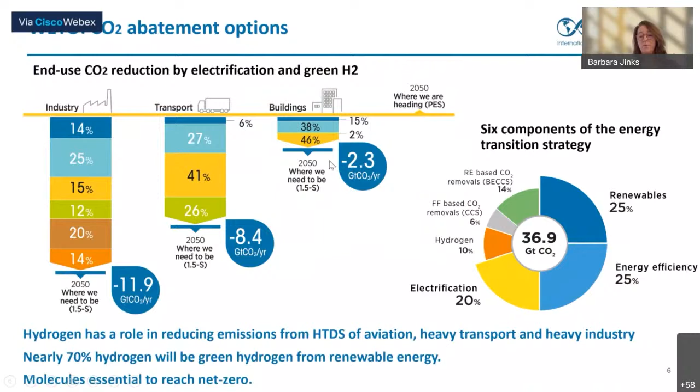So this is why hydrogen is important, and this is why in 2020 we started working on it. One of the key things is not doubling up, not wasting people's time. Our representatives must be invited to a meeting in IRENA every week because we do so much. We look at all renewables. Sorry, I didn't say that we do this for geothermal, solar, wind, tide, wave, current, and bioenergy, the 6 different renewable sources.

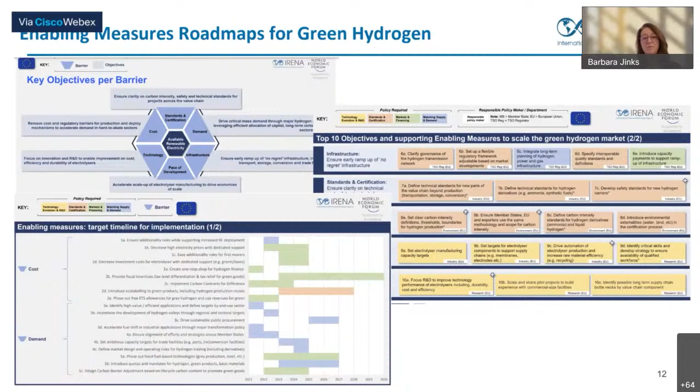Expectations are half the trade will be by ship, but as ammonia, not liquefied gas. It's easier to transport, and it has a range of uses. And the other half, pipeline, of course, the cross-border land-based. Some of the sea, maybe from Algeria and Tunisia to Italy and the other countries. And trade will be mostly regional, not as global, but like LNG. LNG started regional, then it went global.

So I realize I've got a few minutes left, Piero. I'll go a bit faster. Could you please wrap up, so we have time for the Q&A.

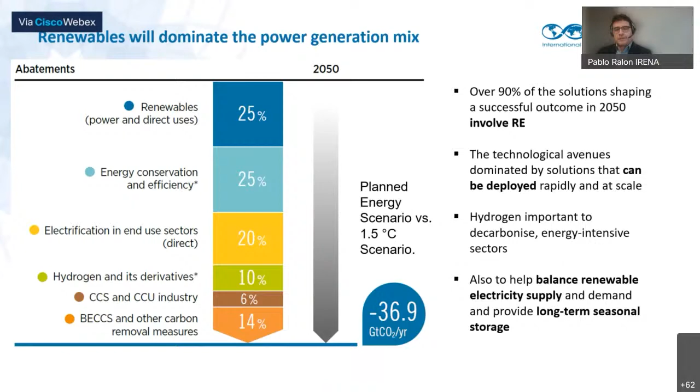Hydrogen also, Barbara talked about hard to decarbonize sectors a little bit more in detail, but importantly, hydrogen can play a big role in balancing renewable energy supply, and also long-term seasonal storage is an important thing that hydrogen can contribute to. So I won't go too much into detail, just to highlight what has been said. The enabling policy framework at this stage is key. National green hydrogen strategies, we've talked a lot about that.

Now, Barbara mentioned that 12% of the total final energy consumption in 2050 will come from hydrogen, and about 2/3 of that will be green hydrogen. This means, in theory, we would need 5,000 gigawatts of electrolyzer capacity by 2050, which is a huge jump from what we have today. And therefore, scaling becomes quite an important aspect, right?

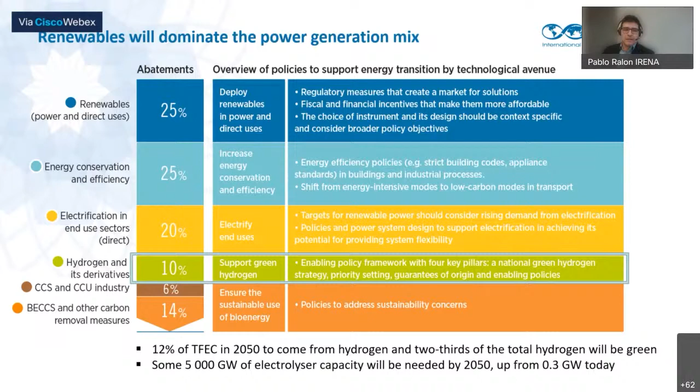The future will look very renewable. That's what we think. To get there, we need to think of power generation tripling compared to today's level by 2050. And 90% of the electricity in the world will be supplied from renewables. Solar and wind will have a key role to play here. Oh, my laser stuck. Try to undo that. And solar and wind are going to have a key role to play. For example, the installed capacity of solar PV would reach 14,000 gigawatts by 2050.

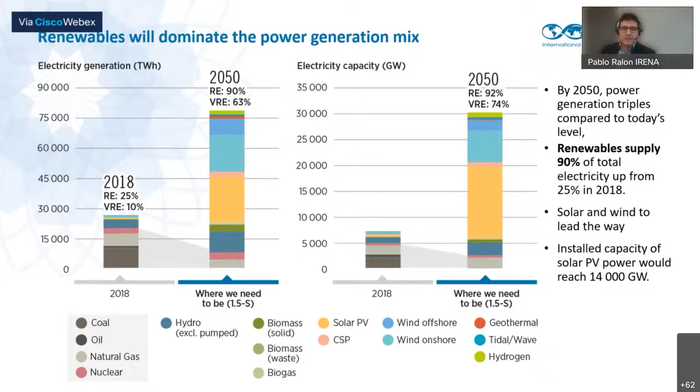But let's get to what people have been asking about. How do we get to competitive green hydrogen? Basically 3 elements. Of course, it gets more complicated than that, but we need 3 elements. We need competitive electricity, we need competitive electrolyzers, and that will lead to competitive green hydrogen.

If we take a look at the news, I don't know if you wake up today to the news. Some people have shifted to digital now, but back in the day, there was pretty much a lot of paper, and this was a lot in the headlines: renewables are too expensive, renewables are not cost competitive. So it's very similar to what we sometimes are hearing now for green hydrogen, in fact. But let's look at what has been happening in the last decade for renewable electricity costs.

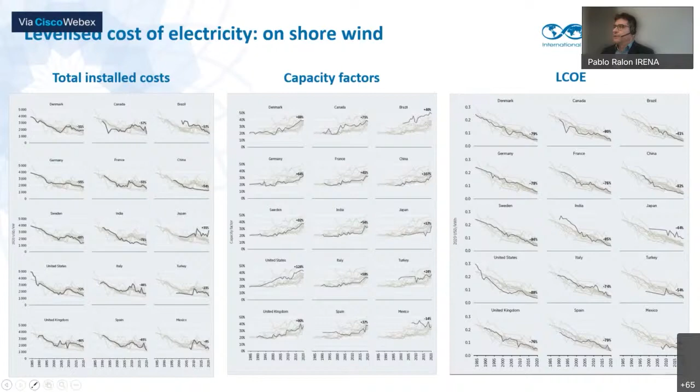Will this be enough to produce hydrogen? We'll see. If we take a look at an example of Saudi Arabia, we've seen some headlines of how you can actually get to very low electricity costs, and we can see how it would be possible to get to 1 cent electricity generation, which is already extremely competitive, of course, but this is the best case scenario with very good solar resource in Saudi.

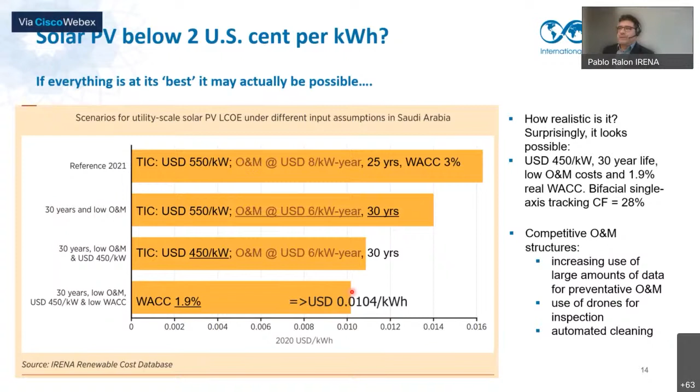This just shows how it might be possible to get to below 2 cents per kilowatt-hour electricity in some locations. Of course, it may not be possible everywhere so soon, but this is already very near term for some locations. We need not only cheap electricity, but also competitive, cheap electrolyzers.

Barbara has mentioned a little bit about what is needed in terms of getting there. Of course, quite a few electrolyzer technologies are being mentioned and are active and being researched on.

Alkaline and proton exchange membrane are already quite mature technologies with technology readiness levels of 8 to 9. Their scale is already higher than for the other two technologies, anion exchange membrane and solid oxide. Of course, solid oxide still has the promise of higher efficiency, and anion exchange membrane has the promise of very low costs, due to mass manufacturing possibilities.

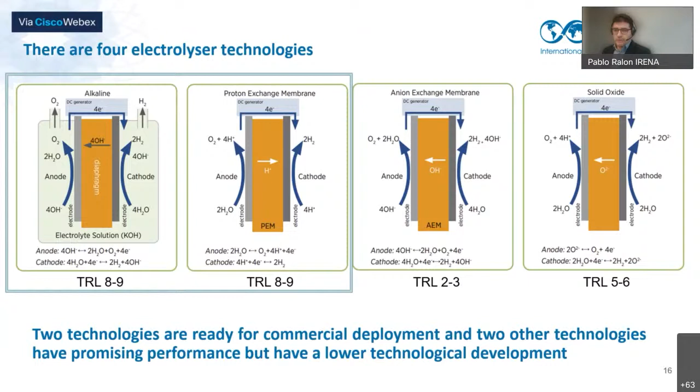But right now, alkaline and PEM are the more mature technologies that are already commercial. So we've tracked their costs - we've researched and surveyed the cost data and the performance data for them. The preliminary data shows a 60% reduction in alkaline electrolyzer costs from 2005 down to 2020, and 67% for PEM.

The efficiencies are harder to assess, but still we come up with a central value of 52 kilowatt hours per kilogram of hydrogen for alkaline electrolyzers, and PEM around 54 kilowatt hours.

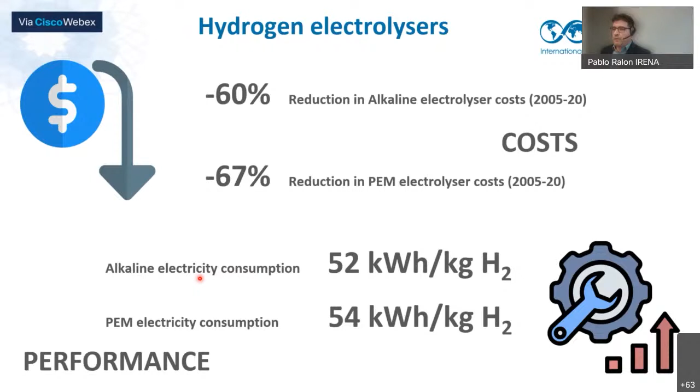So of course, cost as well as performance are important for this equation. Here you can see a little bit of that preliminary data. This is not yet published, but will be soon.

So we see for alkaline electrolyzers, a cost range has already fallen to between 350 to 1,660 per kilowatt. The low cost value is already very competitive, but we'll see how that develops - the central estimate is still to be defined, but it suggests a reduction of 61% from that time. Then for PEM, around 400 up to 2,500 per kilowatt in 2020.

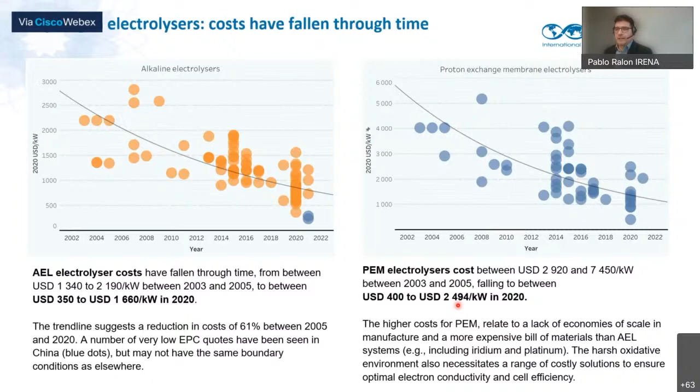Of course, there's not as much economies of scale yet for PEM compared to alkaline electrolyzers. The efficiency scaling, this important aspect, is not so easy to assess, like I said, but we have concluded around 52 kilowatt hours.

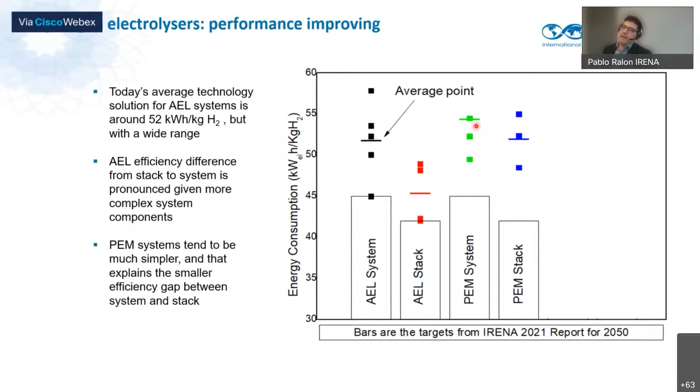This is showing a little bit of the range at the system level, and then here for alkaline electrolysis at the stack level, of course lower. The difference is a bit higher than for PEM because of the complexity of the system. But PEM systems are already very efficient as well, and we'll see how that develops.

What does it mean for competitive hydrogen? We have to check the numbers and see what happens in terms of the economics - this is an attempt at doing that. You can find more details in this report from IRENA, Green Hydrogen Cost Reduction, which talks in much more detail about how we get there, how we can get to competitive green hydrogen.

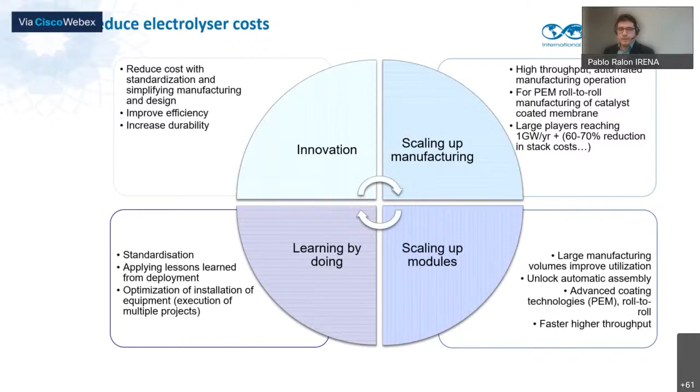It's still a bit of an open question where the research pathways will go. We're working on that in IRENA, but we can see that the pathways pursued will certainly lead to important cost reductions for electrolyzer cost.

If we take a snapshot of today: a quite good electrolyzer cost of 770, efficiency at 65%, cost of electricity of $53 per megawatt hour, 3,200 full load hours assuming onshore wind, and WACC at 10%, we reach around almost $5 per kilogram. But as cost reductions occur and electrolyzer cost goes down to 130, that unlocks an 80% cost reduction in electrolyzer cost, contributing significantly to LCOH cost reduction.

The WACC will change from 10 to 6, and the majority of the cost reduction is related to electrolyzer costs and electricity cost reduction from 53 to 20.

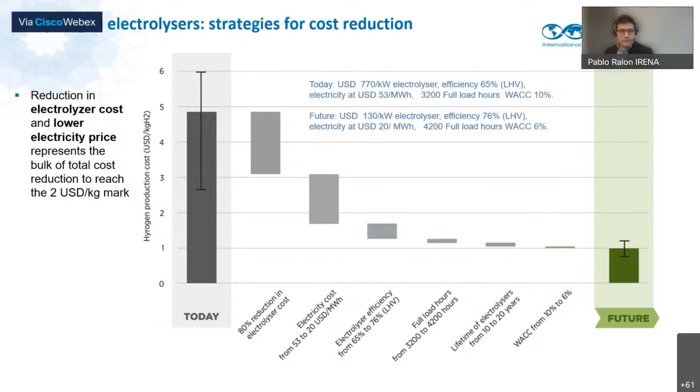The important thing is that as electrolyzer costs fall, it becomes more important to maximize the lowest cost electricity source. This way you can achieve lower costs for hydrogen even at lower load hours. This matters for the system because as hydrogen shifts to areas where resources are not as good as here.

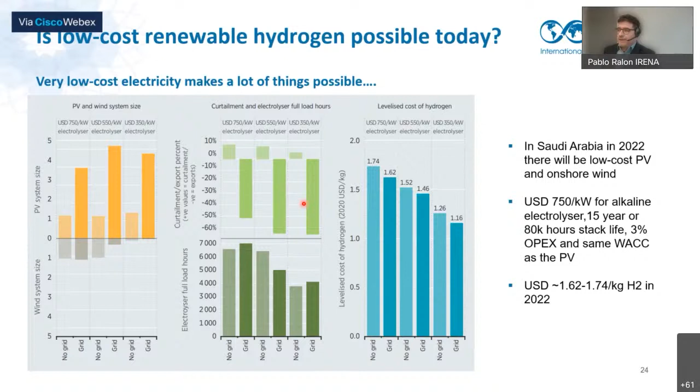Still, green hydrogen will be competitive in those locations. So the good news is that renewables keep and stay at least the cheapest option, and you will see that in the future as well for hydrogen, for sure.

And some key messages for you, Piero. Thank you. But Pablo, if you want to practice your Portuguese, now is also your chance. No, thank you. Move on, Pablo, move on.

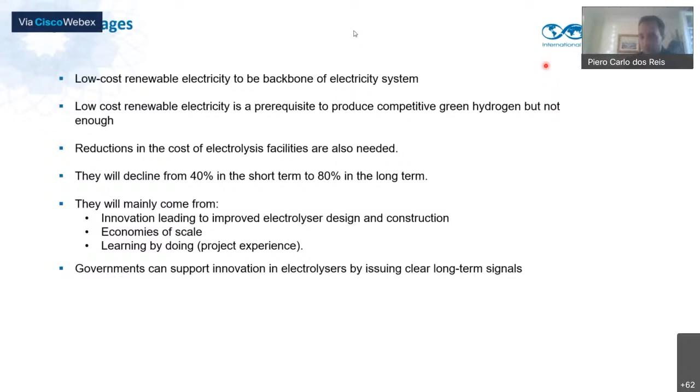So the first question I have for Pablo is, how do you define the CAPEX in your report? Which are the ingredients you include in the CAPEX of an electrolyzer? Because it's a point I was discussing with some colleagues - do you include engineering procurement costs? Do you also include construction? Do you have more information on these components of the CAPEX or not?

Oh, I see. So we assume the system to be already installed. That's the boundary condition there. The other aspects are a bit harder to track, of course, beyond that boundary condition. So typically, for both renewables and electrolyzers and enabling technology, we assume systems already on site, and full system - full stack and balance of system as well.

Including the compressors. There's a very detailed diagram, I didn't show it, maybe I don't have it here, but in that report there's a very detailed diagram of what is included within the system boundaries for the electrolyzer system facility. So with the diagram of the compressors and everything, what is in there, what is not - I can link to it. That would be great, yeah, without any rush.